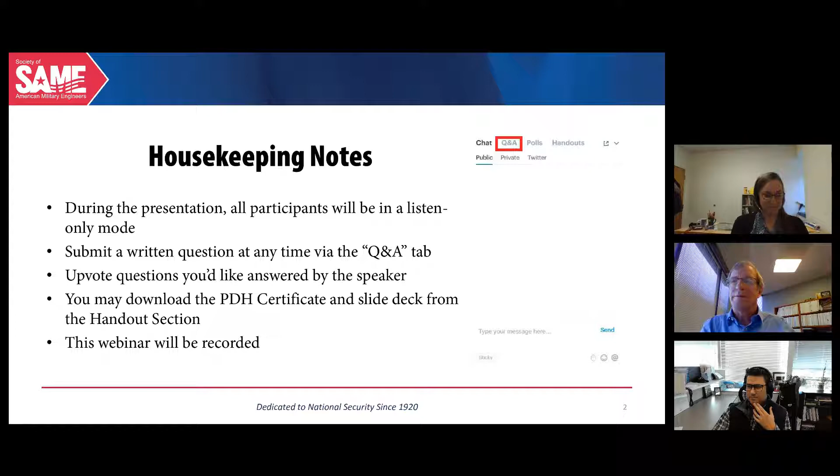Originally published in the July-August 2021 issue of TME, Restoring a Missouri River Basin Levee covered a project to repair and close a federally managed levee system in northwestern Missouri after catastrophic flooding due to a bomb cyclone in March of 2019 overwhelmed the downstream Missouri River flood control system. The approach utilized mechanical sand removal and leveraged local subcontractors to expedite the project's completion and also increase the final resiliency of the surrounding community.

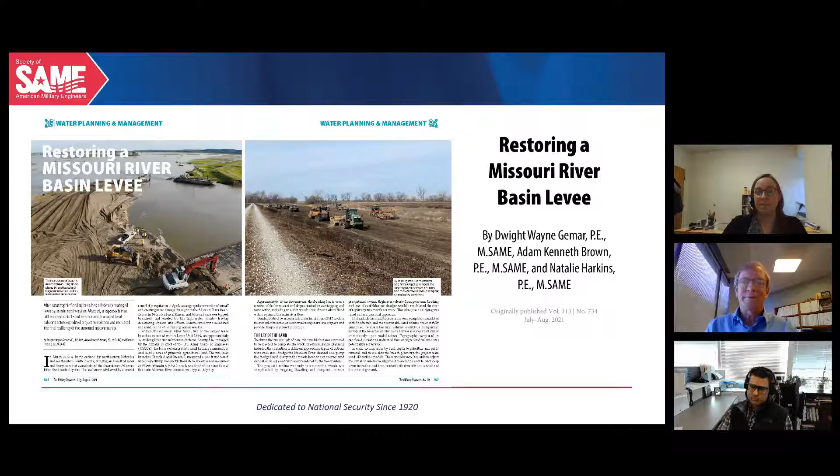And with that, I'd like to introduce the authors of the article and today's speakers. Dwight Gemar, PE, is Vice President and Principal Project Manager with Weston Solutions, where he leads and manages rapid response and large-scale closure remediation programs, including closure of major breaches within the Missouri River levee system. Adam Brown, PE, is Deputy Director of Engineering and Principal Project Engineer for Geotechnical Design at Weston Solutions. He was an initial responder to the Missouri River levee system repair and led incidental engineering design tasks involving borrow planning and monitoring and planning for breach closure, geometry, and hydraulics.

And our third speaker, Natalie Harkins, PE, is practice leader of civil and geotechnical engineers and project engineer, also with Weston Solutions. She performed both field and home office support of the Missouri River levee system repair and led engineering and construction engineering tasks for both major breach closures and borrow infrastructure planning. With that, I'll turn it over to our featured speakers.

Thank you, Daniel. This is Dwight Gemar. It's a pleasure to be with you for this webinar. I served as project manager on site during the work that we'll be describing during this presentation. Both Adam and Natalie were also on site providing engineering support during the flood fighting stage of this work.

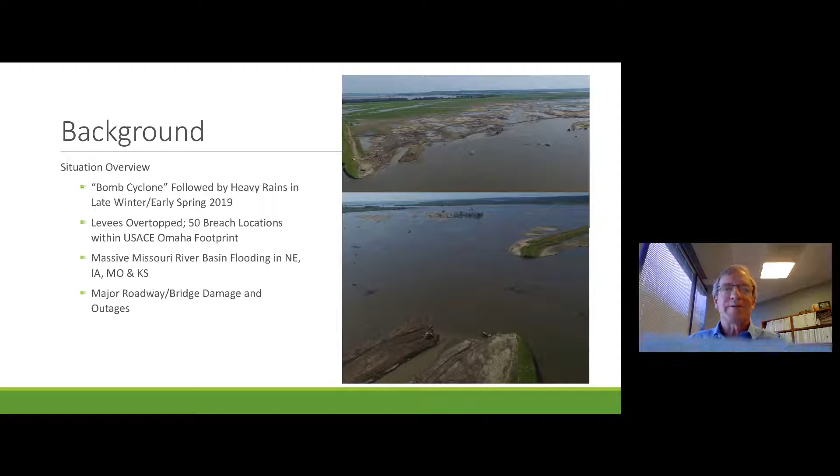For some background, in March of 2019, the upper Midwest experienced a bomb cyclone weather event, which dropped heavy snow in the area. This was followed by heavy rains, which melted the snow while the ground was still frozen and created large runoff into the tributaries of the Missouri River. This in turn overtopped the downstream levees across the multi-state area, resulting in 50 breach locations within the Army Corps of Engineers Omaha district footprint, and resulted in massive flooding in Nebraska, Iowa, Missouri, and Kansas, which caused major damage to roadways and outages, as well as bridges and rail lines.

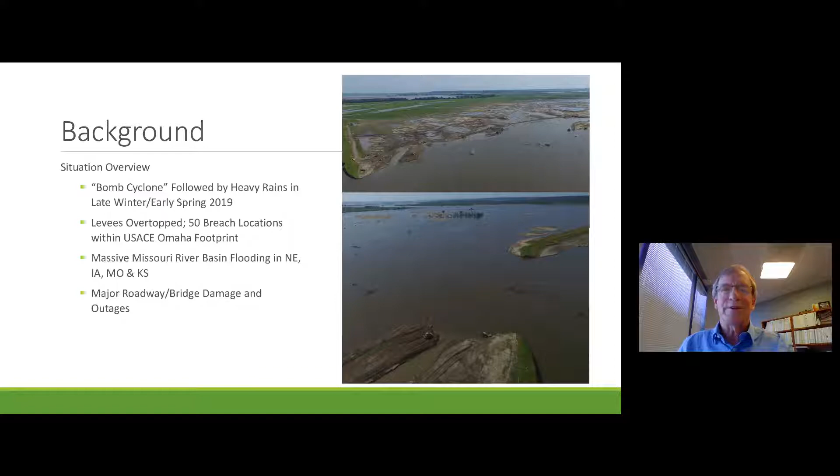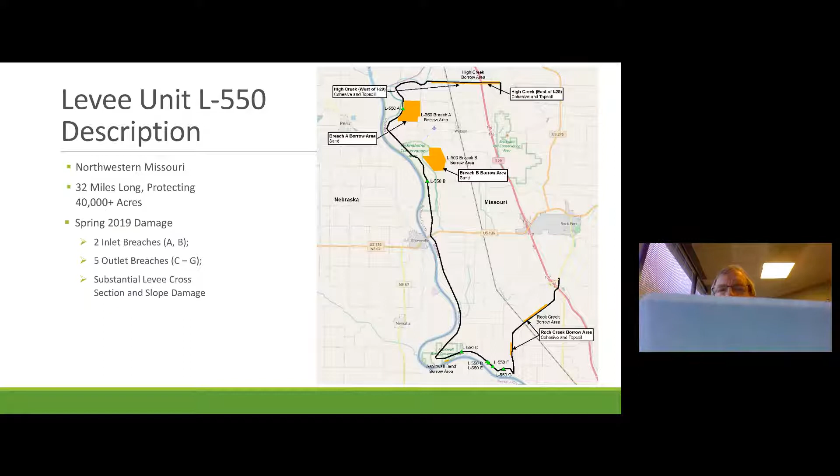A couple other things to note on this figure is the location of 2 inland areas that were potential borrow sources, which are shown in kind of an orange color. One was located adjacent to Breach A, which were sand deposits from the 2019 flooding event. Another potential area of borrow for non-cohesive was about 1 mile north of the B breach, which actually were sand deposits from a 2011 flood event and breach.

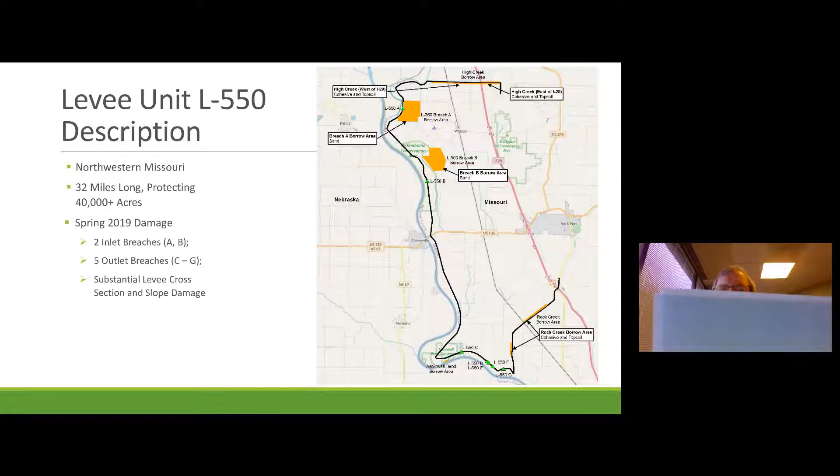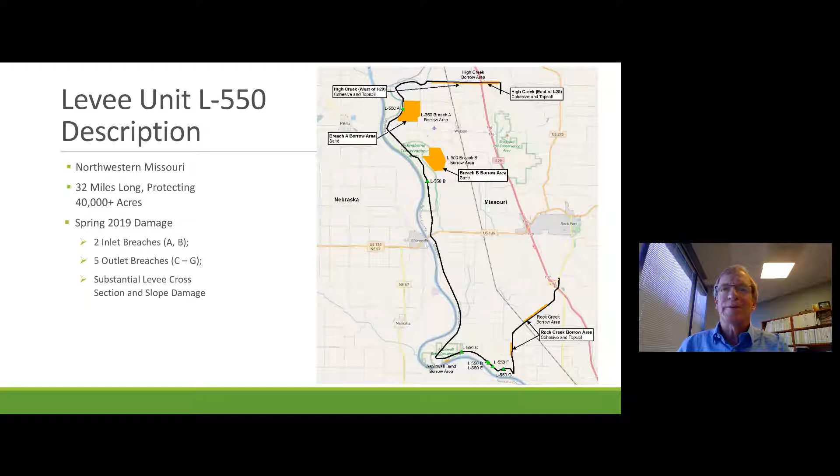Also to note, for future reference, cohesive areas were located in the areas up in the north toward High Creek, and then further south at Rock Creek.

So in June of 2019, there was still massive flooding occurring. The water levels were still well above flood stage in the Missouri River. And this was due to heavy rains that continued through that spring. Also, the upstream dam at Gavins Point in South Dakota was having some heavy releases, and so that contributed to the high levels of flooding in this area, even into the month of June.

In that month, the Corps of Engineers awarded a contract to Weston Solutions through a contract geared toward rapid response for repairs of infrastructure. And this was managed again through the Omaha district of the Corps of Engineers. The initial objective of that contract was to close the inlet breaches to stop the flooding, as well as to restore the levee height in those areas to a 25-year flood protection elevation.

Subsequent work that was awarded under that contract involved a closure of the outlet breaches, repair of the critical infrastructure loss cross-section, and restoring the levee to pre-flood or as-built conditions, as well as repairing slope and seepage berm damage, and also restoring the levee crest surfacing, and in some cases, repairing drainage structures.

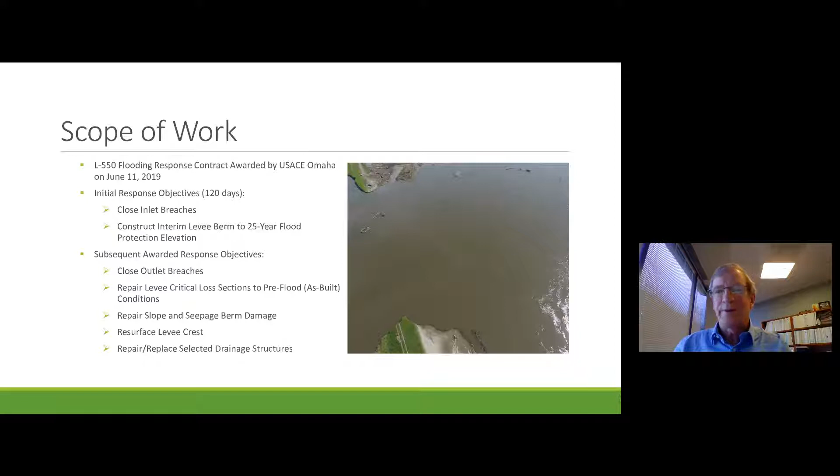In June of 2019, the site conditions were still quite challenged due to the active flooding. Roads accessing the levees were flooded and damaged. The inland borrow areas, which were targeted for non-cohesive sand deposits, were underwater. Therefore, the quantities of available fill were unknown.

The Corps of Engineers did offer the potential for a couple of borrow areas within the channel of the Missouri River itself. However, there were other levee systems further upstream that were already under repair, and river dredges were unavailable. Also, the high river levels due to the continued flooding were a challenge and probably would have precluded dredging in the river.

Breach A especially had a very high volumetric flow rate, measured at over 15,000 CFM, which was going to be a challenge, as Adam and Natalie will describe. And the fill volumes were quite large, estimated by the Corps of Engineers at roughly 850,000 cubic yards. So again, these were some of the site conditions that proved to be a challenge as we mobilized to the site in June of 2019.

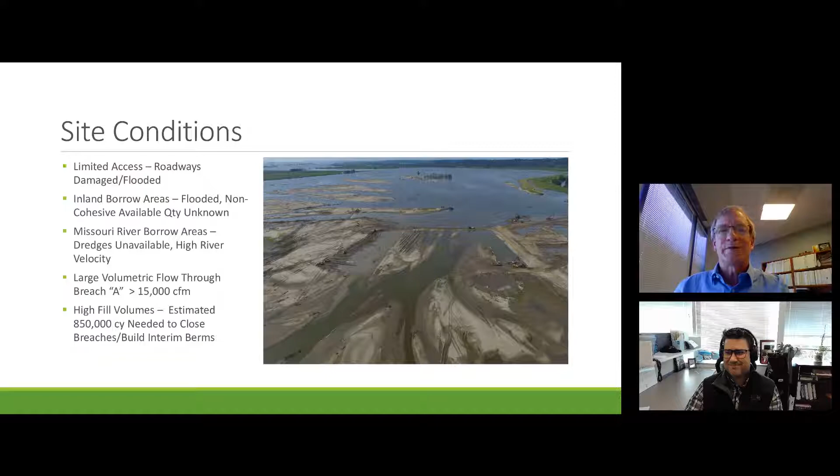At this point, I'll turn it over to Adam Brown, and he'll describe in a little more detail some of the technical aspects of the work involved in getting the initial closure completed. That's right. Thanks, Dwight. So the task was simple: fill the breach. Our first step was to get closure restored and stop the flow of water through breach A. This was the largest contributor to floodwaters in the sectional levee.

Once we got that established, we could build a landside berm and buttress the closure berm and really start filling the large scour and riverside losses. Once we were high and dry and had our base set with phase 2, then we could start building our sand core and armoring. We did have recent bathymetry that was shot right after the failure occurred, that was provided as part of the early phase before we mobilized to the site.

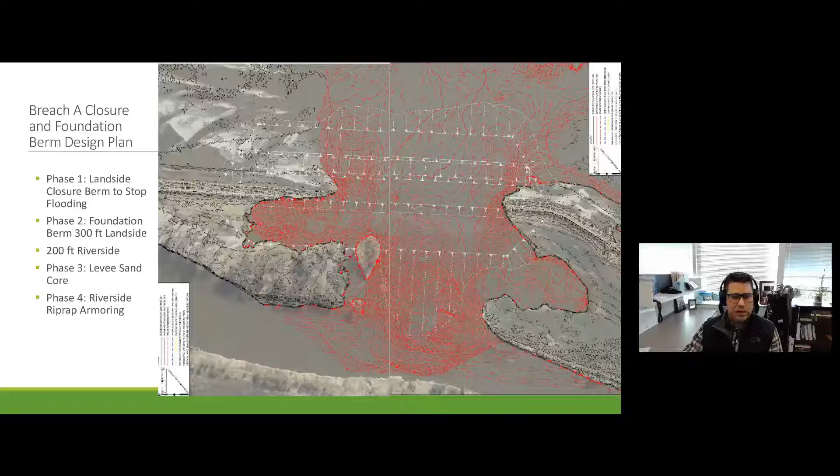So here's that same breach. This is a breach in cross section. Note there is a scour hole located to the bottom left of the cross section. There was an additional scour hole, about 30 feet deeper, that was further south on the levee section. Knowing our closure berm could be anywhere inside this section, we planned to align it in that blue area to the right, as suggested by USACE in their planning documents.

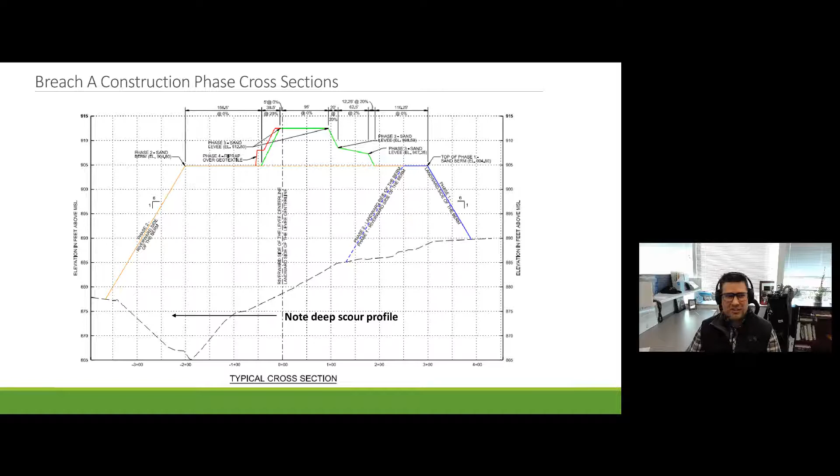This was the land side. It was the shallowest, and it wasn't the straightest distance to closure, but it minimized the quantity of soil needed. And that's kind of the beginning of the story of how our first contingency plan was about to take shape. But first, we'll talk a little backstory. So here's one of the many tick maps we produced during the project.

The ticks show the value in feet elevation between two surfaces, and it shows as red when the 2011 survey was higher than the existing grade, and the blue means that the existing grade was higher than that pre-flood survey. This blue reflected a deposit of material that we could plan to use to fill the berm.

To get this survey, we couldn't just fly the area. This is about a square mile area, which would be really nice to be able to fly, but we can't do that when most of our material is below water. Also, the water was fairly shallow, so actually doing bathymetry was pretty impractical.

So we captured most of this using manual surveying on foot, and then shallow depth manual surveying with surveyors stationed on airboats crisscrossing the area. This was difficult to capture nuance, but they did a great job, albeit being fairly slow. We then tied that to some updated bathymetry near the breach to complete the overall picture, and the breach is to the left side of the screen.

This was our main tool of determining where sand was, and it allowed us to confirm our suspicion that there was enough to construct all phases of work. The black line outlines depict where our islands were. These islands were sand that were above the floodwaters and that we could borrow from. Our access road, however, was all the way to the north where that dashed line is. So getting to it, you needed a boat. It was surrounded by water.

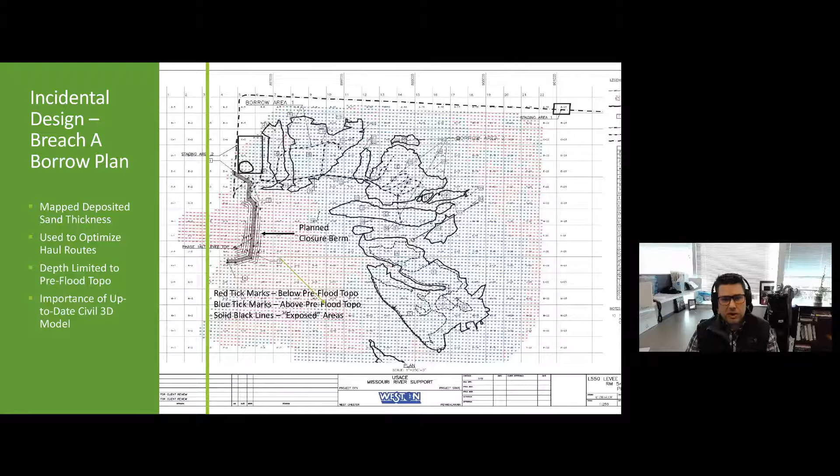You'll notice on the closure berm with the big arrow pointing to the hatched area, there's a pronounced jog in the northern section of it, and that's when we realigned it. That I'll discuss later. This was our first contingency plan that we dubbed Go Shallow, Go Fast. This realignment allowed us to achieve our target milestones for closure and actually reduce the quantity of sand needed for closure based on this updated bathymetry.

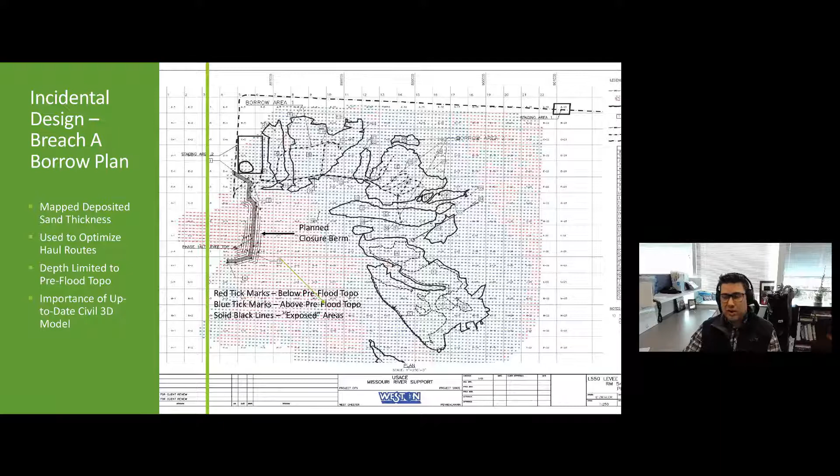This berm was located outside of the main berm's cross section, but it was incorporated into the seepage berm completed during later phases. This was a very critical hydraulics decision, as we'll discuss in a minute.

So now we knew where the sand was, we had to get to it, and there's about 3,000 feet of flooded farm field that separate our closest access to the next spots of dry land. So swamp buggies to the rescue. These are basically excavators with float tracks dragging hydraulic power units and booster pumps, and they were mobilized and started creating our access roads, and then began pumping our sand deposits from the dredge locations over to the breach.

They required a depth of about 2 feet of water to operate, and we kept about a 12-inch buffer from the farm field to ensure we weren't pulling up their precious material. We used this in conjunction with live updates to our Civil 3D model to allow us to prioritize and confirm we could get all that we could and determine when areas were no longer dredgeable based on real-time flood elevations.

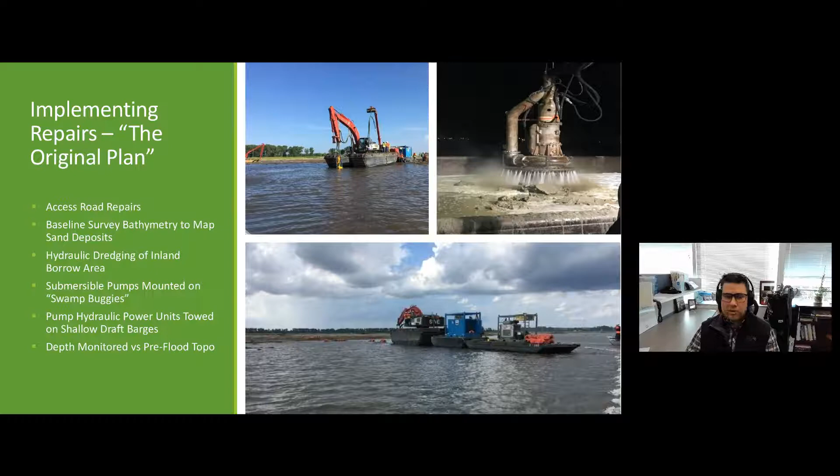This production was slow, but we did accomplish about 300 feet of closure berm before contingency plan number 2 had to be enacted. We knew at some point this was going to happen. We had to turn this job into a conventional earthwork job at some point or another. This was either when the water drops after our closure or as floodwaters receded. The up-to-date Civil 3D model allowed us to determine when sands were dredgeable and when they weren't.

This allowed us to determine what our operating window was and make the decision based on the equipment we had. Larger diameter pumps and booster pumps and pipe were already spoken for by a lot of the other repair efforts, so we were really working with what we could get our hands on. But using the predictive flood stage and weather forecast provided by our USACE partners, we were able to make an informed decision to pivot early.

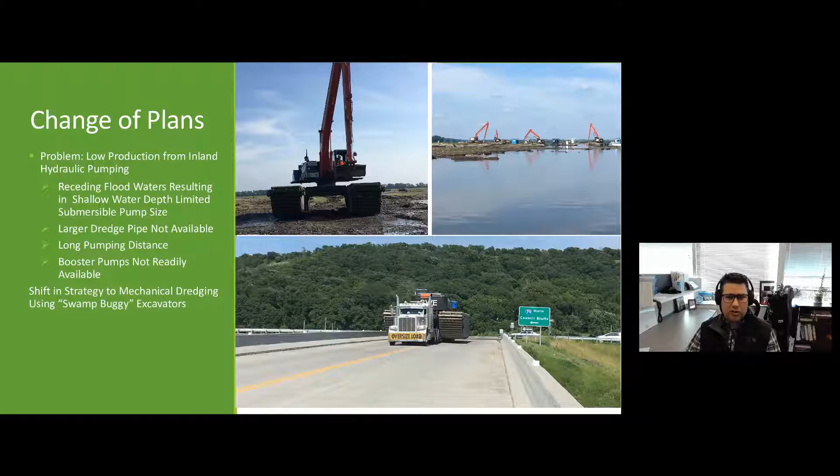And the pivot was pretty much overnight, where the swamp buggies that had pumps mounted to them were swapped over for conventional buckets. And they got to work building roads between the sand islands. And that's really when the real magic happened.

We dubbed this next phase Farmer Strong. We derived this name based on the amazing camaraderie and teamwork, and sometimes competition, on display when you put to task an army of farmers with flooded fields and hungry tractors. The sand roads were built between the islands ahead of the scraper army, while dozers and box blades with conventional excavators turned the islands into usable borrow mounds. When they were done, there was pretty much only water and a highway next to the next island.

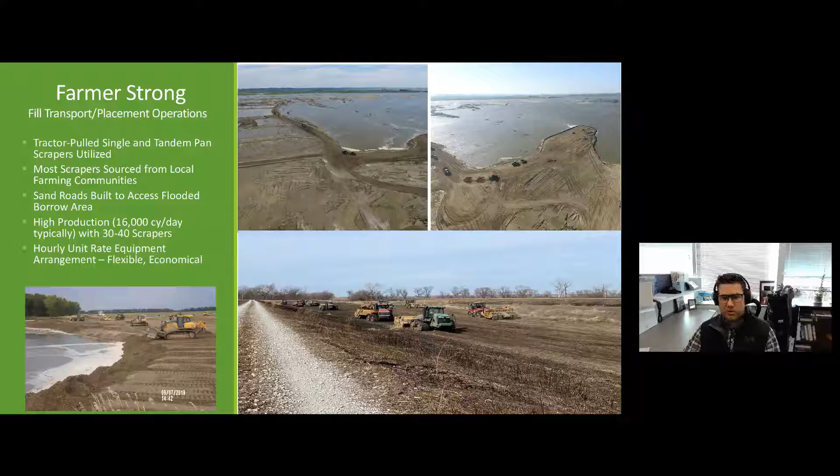With this flexible equipment roster, we managed to make hay when we could and go lean as waters rose or weather rolled in. We kept a typical production of about 16,000 yards per day with 30 to 40 scrapers running. My favorite quote during this phase was over the radio, one tractor operator was requesting to have his tractor bumped up another horsepower so he could pull an extra scraper. So with this going on, we were making tons of progress. Closure was imminent, but we knew we had a challenge ahead of us.

As closure progressed, the flood stage continued with the full flow of the Nishna and some water flowing backwards up from the Missouri, still trying to come through our breach. And this was said a lot, and I'll say it one more time: Q equals VA, and our area was closing fast. To plan for this, we expected an uptick in velocity, and we utilized the program HEC-RAS combined with observed conditions to develop a predictive model to determine when the velocities would start to work against us.

Our major concerns associated with this increase being the loss of our leading edge, shown in the upper left-hand corner to the bottom of that photo, the slough, the scour of the existing levee, and the deepening of the channel as that velocity increased. If you could play that first video.

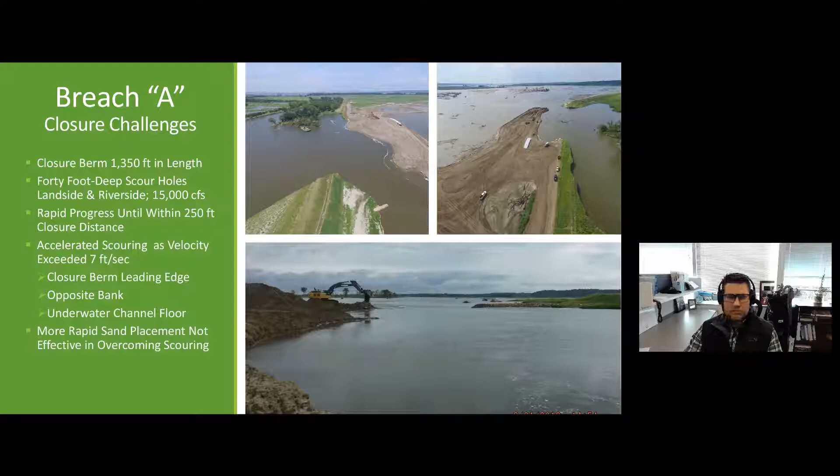So there was an attempt. We pictured there 8 D8s and 1 D9 pushing a pile that had been amassed the previous day, late into the evening, working to push the sand out towards the breach, using live updates from the survey equipment mounted to these dozers, and hand readings of the slough face on the leading edge of the sand. We confirmed what we knew would happen. Our closure progress was beginning to get eaten away by the flow of water. All right, back to the slides.

The workaround contingency was already in place. We put our model predictions to task. Using HEC-RAS, we developed a procedure for closure that not only closed the gap, but armored the opposite bank to keep it from retreating and brought the floor up to decrease the shear forces. The riprap sizes were increased as predicted using the tool so that we would have the correct size rock sourced and ready to be placed on site. We did continue filling with sand with riprap armoring while we were advancing the closure to provide a safe workspace for the tractors, but we switched it so that there was more on the land side protected by the armoring.

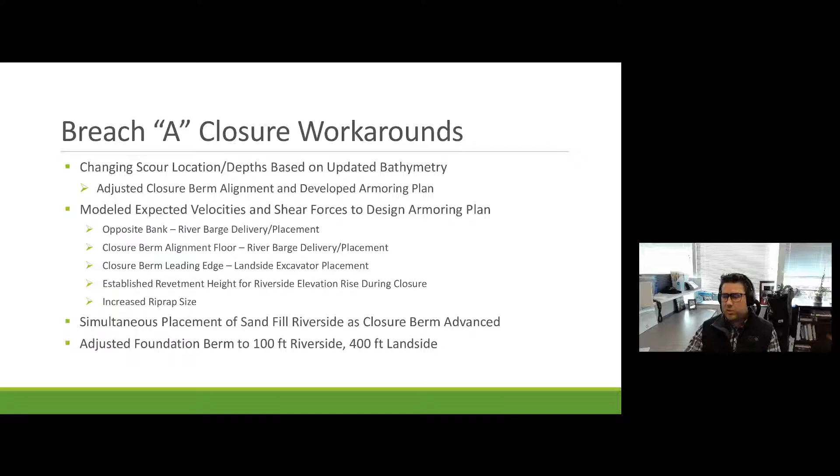We did engage geotechnical modeling because as we advanced to our closure berm, our berm footprint decreased. So we utilized the program SLOPE/W and calibrated against observed performance in the field to avoid any equipment loss because the berm shrunk. I'd love to tell you how it exactly went, but unfortunately I had to demobilize, and Natalie Harkins is going to take over and tell you how it all went. Go ahead, Natalie.

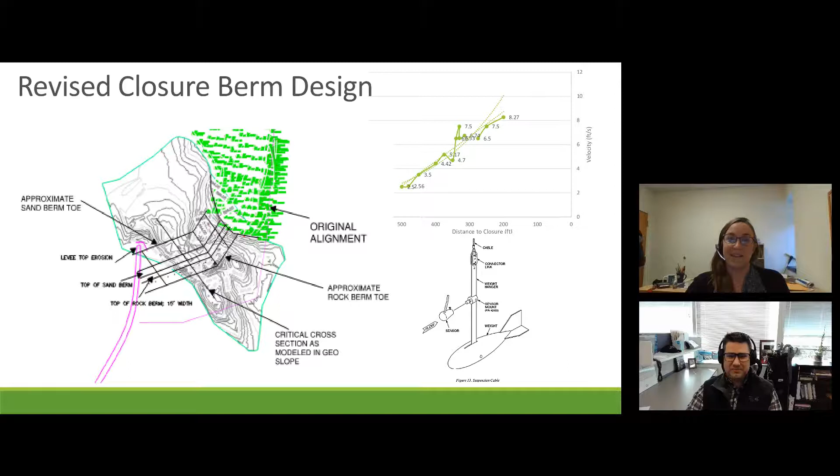Thanks, Adam. Okay, I'm going to stay on this slide for a minute and speak on the final steps towards closure of the breach. We stayed around 200 feet to closure for a few days to a week before we could really make more progress again. Like Adam was saying, we would survey the edge of our berm with the GPS system before departing the site, which really helped us take a look at where we were in AutoCAD and how far we needed to go. So we would take that survey around 8 p.m. and come back early the next morning to find loss of our sand berm right back to about 200 feet to closure, where that velocity was about 6 to 8 feet per second.

So safety was always forefront in our operations, and as the water velocity increased, it would eat away that leading edge of the sand berm. Therefore, we needed to make it wide enough so that the equipment had room to work and a buffer of sand so that the equipment wasn't working at the very edge while the velocity was cutting away that sand. The berm also had to be wide enough so that scrapers could bring in sand to the dozer towards the leading edge and travel right back and get more.

So at some point it became difficult to get accurate velocity readings with the meter that we had. The meter eventually maxed out as crews worked during the day to close the breach. And at a point, we were unable to get far enough into the breach water to collect the data by the boat as the water became more and more turbulent.

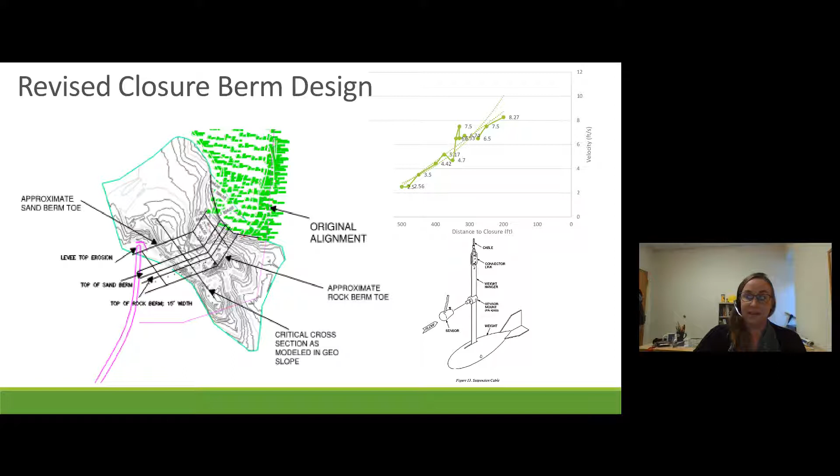So we decided to work days and nights to keep up gaining on the closure. During the day, the crew would make massive piles of sand needed to keep both the day and the night crews working. So we could play the video.

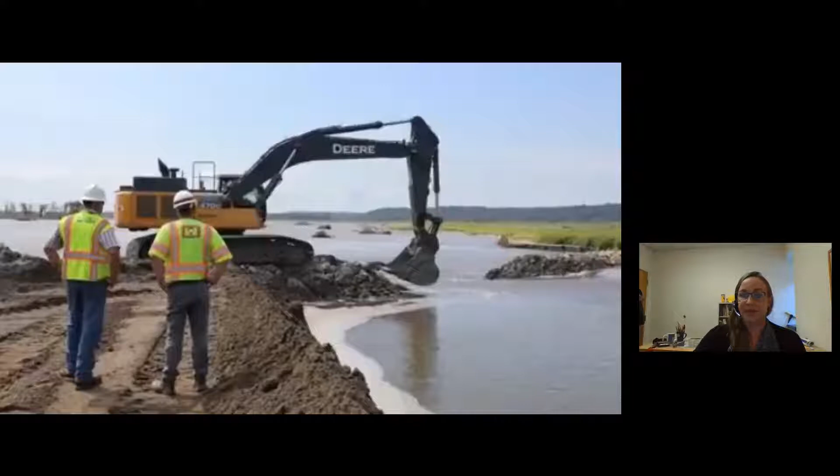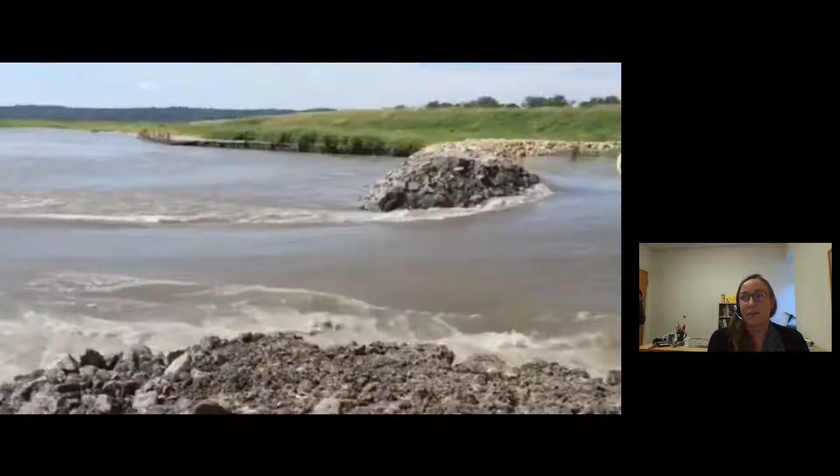After a little, it became apparent that the strategy wasn't working and we had to retool. First, we tried a series of super sacks provided by the Corps, which are 1 cubic yard bags made out of a geosynthetic. Those were placed by dozers and a barge-mounted excavator to combat that water velocity that you can see here at the leading edge of the berm.

We did end up nearly closing the breach with that method, but we could not add super sacks at a pace in which we could close the berm entirely. As we neared closure each time, we would also open up a larger scour hole on the other side, the side that you see right now, land side of the berm, which we would have to fill in at a later date. Okay, you can play the next video, please.

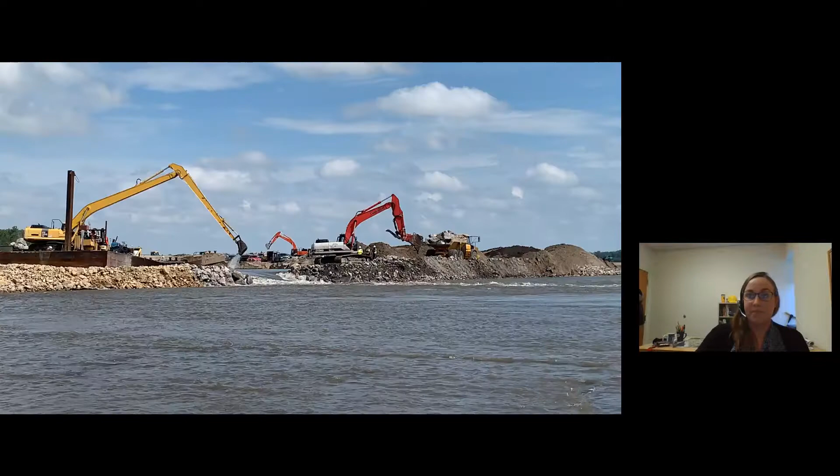So it was decided to bring in shot rock to get final A-breach closure. At first, we ordered whatever shot rock was available in the area. Then we became a bit more picky as we neared closure. As you can see, closure was achieved by adding shot rock from a barge-mounted excavator from the south, in conjunction with an excavator mounted on a rock berm from the north. The very final rock placed was about 4 foot in diameter, and this was placed carefully by that excavator shown at the north.

Okay. And here are some aerial views of the closure at A-breach. The water rose to about 1.25 feet on the riverside during the final closure, but we were able to predict a value similar to that so that we could raise our rock berm construction to a certain height. So with the shot rock placement from the south and the large diameter rock placement from the north, we were finally able to close breach A.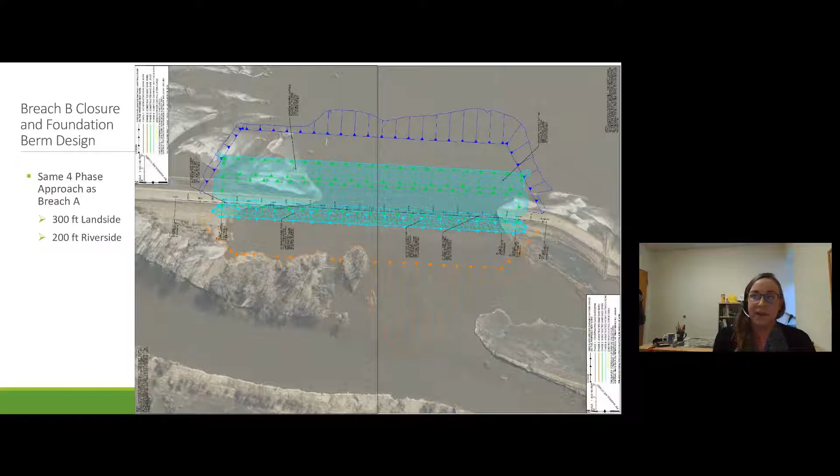The borrow area was a bit further away with respect to the distance for the borrow to A breach. Also, a wildlife preserve was located in between B breach and the borrow area, and we wanted to keep that intact as much as we possibly could. We went through the same process and compared historic LiDAR survey data to more current data, and we were able to find pockets of available sand to bring in for the foundation construction.

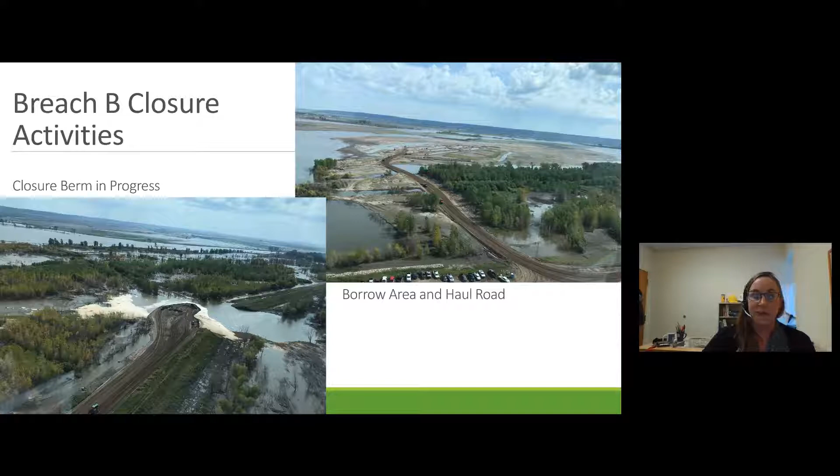While B breach closure had its challenges, it was a little bit easier to close than A breach, as you can imagine, mainly because we weren't fighting the velocity of the adjacent Nishnabotna. We were able to identify a channel from the Missouri River that was feeding into B breach, and we closed it off at the source a little bit upstream of B breach. We constructed a rock revetment at that area and slowed the velocity down to almost 0. Due to those proactive steps, we completed closure at B breach with sand only 3 weeks after A breach was closed.

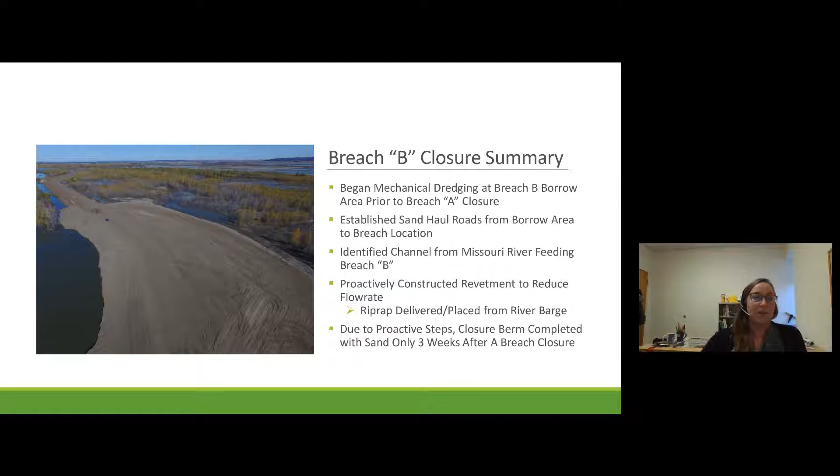And so in December, the Corps tasked us with closing 5 more outlet breaches, C through G, and we needed to complete repairs and achieve our full design levee height by March of 2020. Those repairs included crest repairs, side slope and ramp repairs brought on by the flooding events of the year prior.

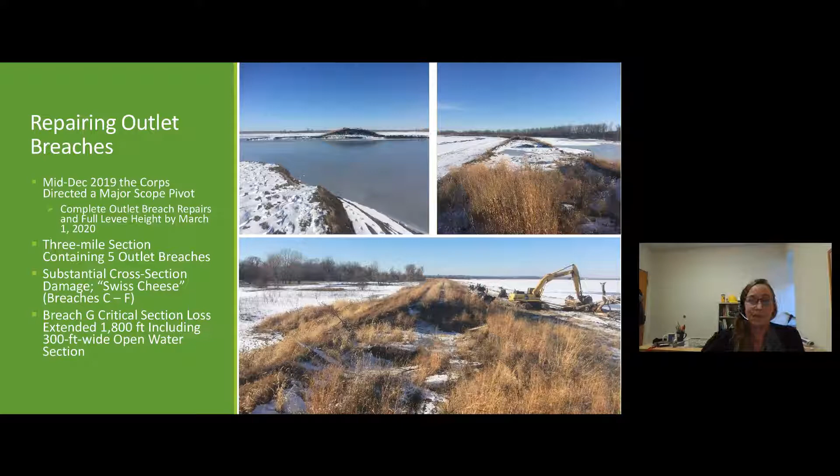So in this slide, you can see G breach had its own set of challenges, mostly due to the weather and freezing conditions. You can see the water iced over here. And G breach alone extended 1,800 feet, including 300 feet of an open water section.

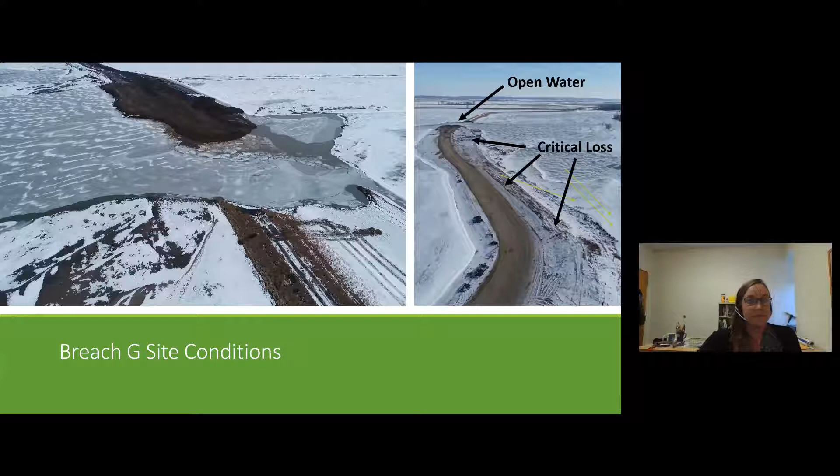So some of the challenges from the outlet breach repairs included major damage to access roads, in which crews had to build up roads for one-way traffic. A night shift was added again in early January, and trucking of sand and cohesive material increased over time to 110 trucks hauling sand and cohesive soils on each shift, each truck transporting about 6 loads per shift, which equated to about 60,000 truck miles a day.

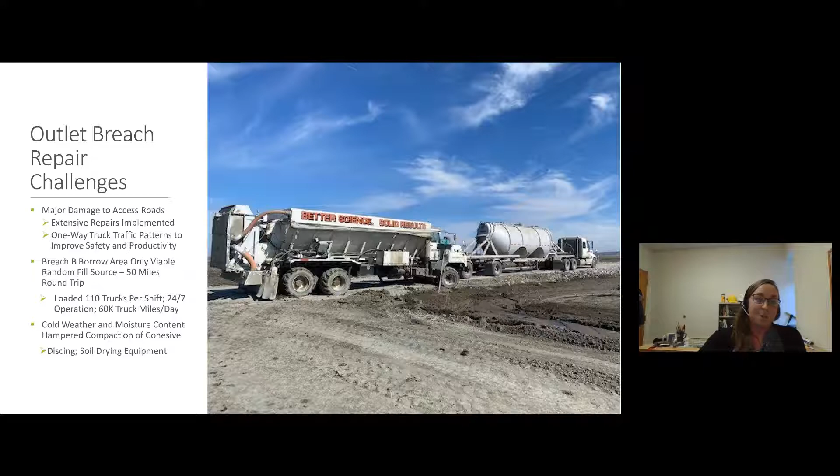And here you can see aerials of Breach G closure. Despite the weather and trucking challenges, Breach G was closed on February 10th, and full levee height was achieved on March 2nd of 2020.

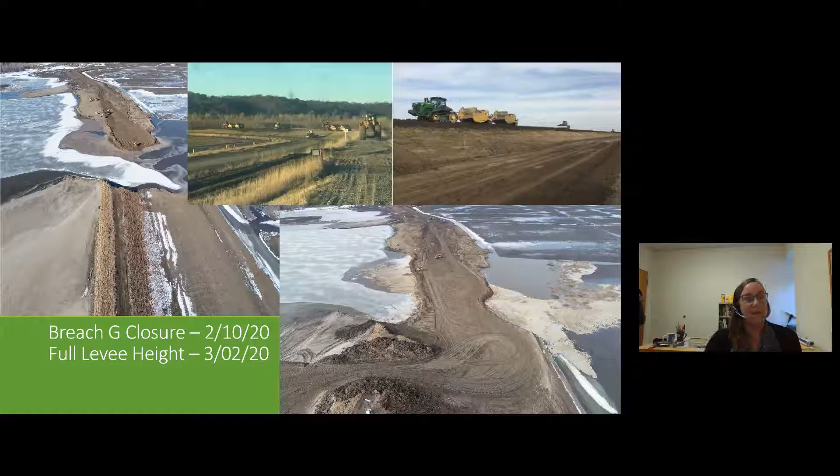And now I will turn it back over to Dwight so he can provide a summary and some more closing remarks. Yeah, thanks, Natalie.

I'll say a few words about quality control and safety during the work. As Adam described, the 3D modeling was very helpful in terms of evaluating the amount of sand deposits available on the inland borrow areas, as well as to optimize the alignment of the closure breach.

Due to the size of the levee system, the work areas were often separated by many miles, so we had separate crews managed by our site superintendents, safety and QC personnel. We had individual safety briefings that were held at each location to discuss hazards for those locations. Given the wide area, some of the challenges from a safety standpoint were fatigue management, communication, and congested work areas.

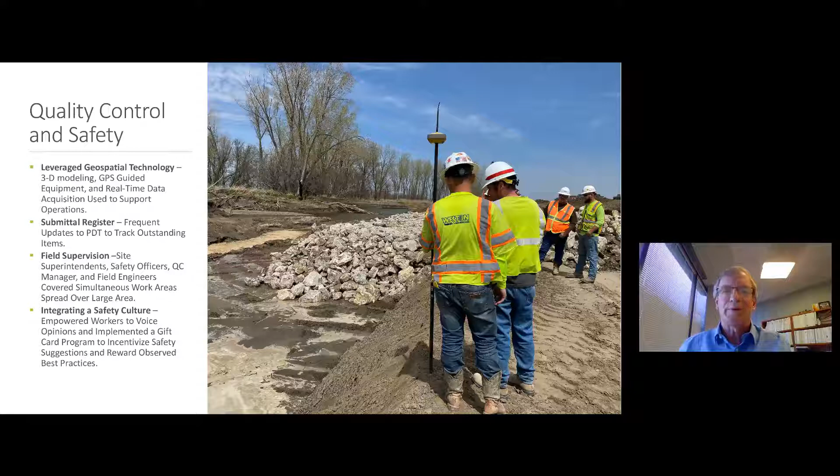During the safety meetings, we encouraged workers to voice any concerns that they had, to get as much engagement as possible. And we also implemented during the work a gift card safety incentive program to help encourage safety suggestions, as well as to reward best practices. Those were given out on the spot and or presented at the following day's safety briefing, just to reinforce again the importance of safety.

Team collaboration was key. I think one of the real successes of the project was the dedication and can-do attitude of everyone involved. Everyone from the operators to the supervisors to the Corps of Engineers personnel, and also the support we got from our stakeholders. It was really a team effort.

It was done under a contract through the Omaha Flood Recovery Office that was streamlined and provided flexibility for us to be able to adjust quickly and as needed to address changing conditions and or to pivot when necessary to address other changing priorities. A key component of the work was the project delivery team. Again, this was led by members of the Omaha District Corps of Engineers, and also included representatives from Weston, our subcontractors, and other key stakeholders.

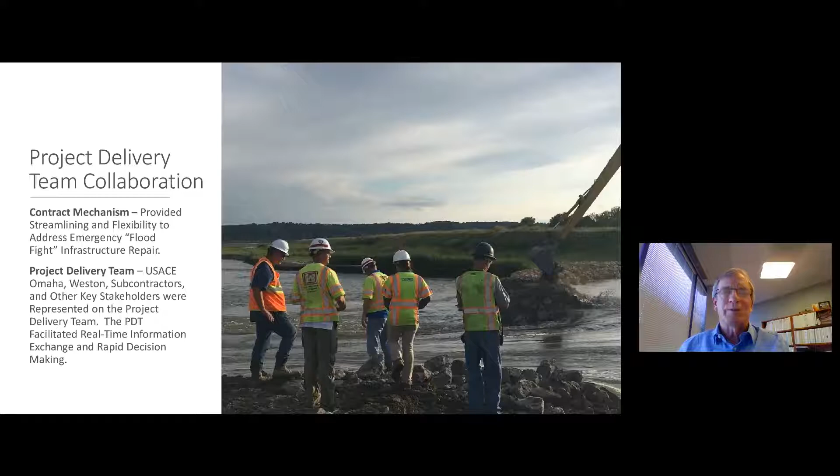The PDT was, I think, very instrumental in providing a forum for open and early and often communication. And we met at a minimum weekly and often more frequently to keep everyone informed of the progress, any challenges and workarounds that were needed so that those decisions could be made on a rapid and real-time basis.

As both Adam and Natalie indicated, contingency planning and being proactive were, I think, integral to completing the mission within the time frame that we did. The technologies that were described were useful to optimize the completion of the work. And then lastly, to foster a safe work environment, we empowered the workers to be a part of that mission, as well as reinforced best practices with a safety reward program.